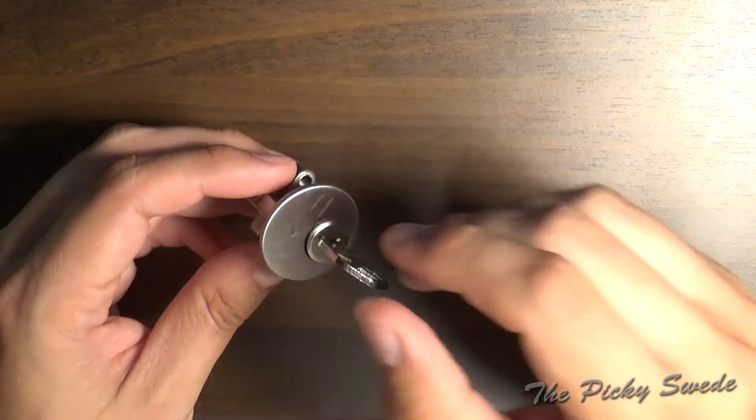Today we will make the TKO3 challenge lock better, or harder should I say. It's a really good starter challenge lock for anyone who is into trying to pick a challenge lock. But the creator of this one wanted me to make it a bit tougher to pick.

So, as you remember from my last video, I picked and gutted this lock, and judging by the pins in this lock, I can tell that the creator didn't have any kind of plan, just random pins with different shapes and sizes and different springs, but he hadn't thought out a big plan on how to design the lock to be hard to pick.

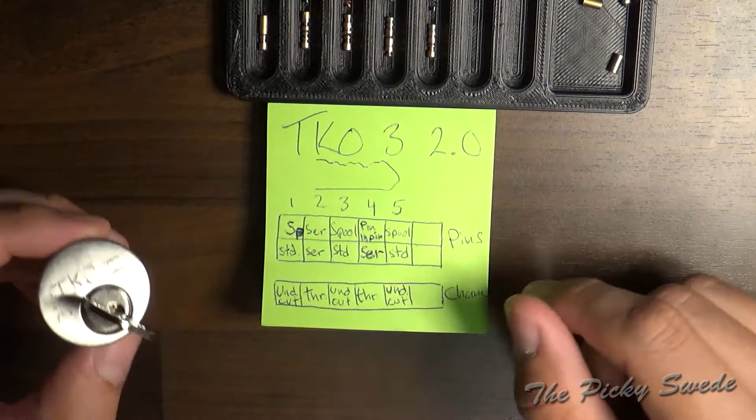So in order to do that, you have to plan, and I have made a small plan here on this post-it note, and I will modify the lock accordingly. And now, spoiler alert for you guys who maybe want to pick this lock later, you should probably not view this video, at least not this part.

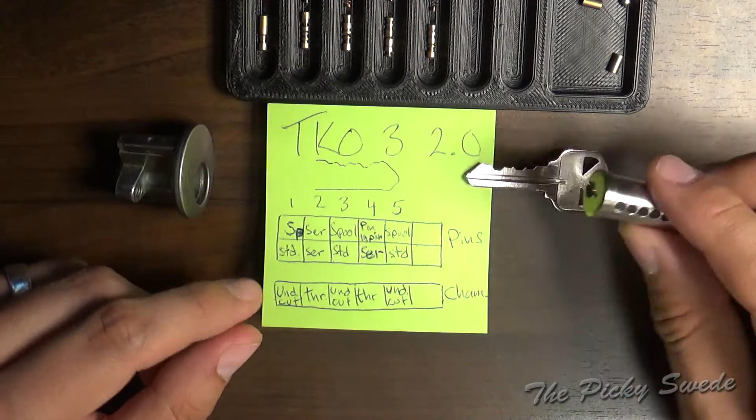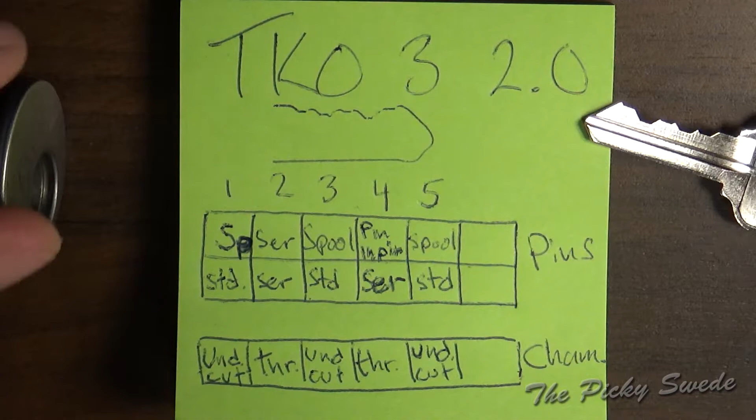The first thing I'm gonna do is go through my thoughts with the pins here, and I'm gonna zoom in for you guys. I hope you can read my writing, but we have the pins here, the bottom pins and the top pins, and we have the chambers. So in chamber number 1 we will make an undercut, partly because he has already made some kind of undercut in chamber 1, so we will build accordingly.

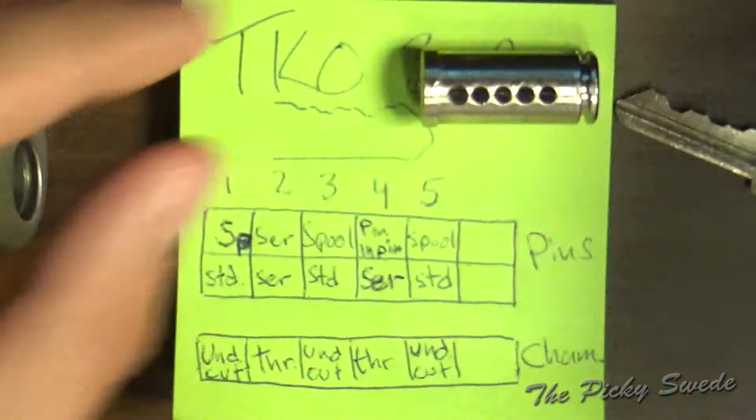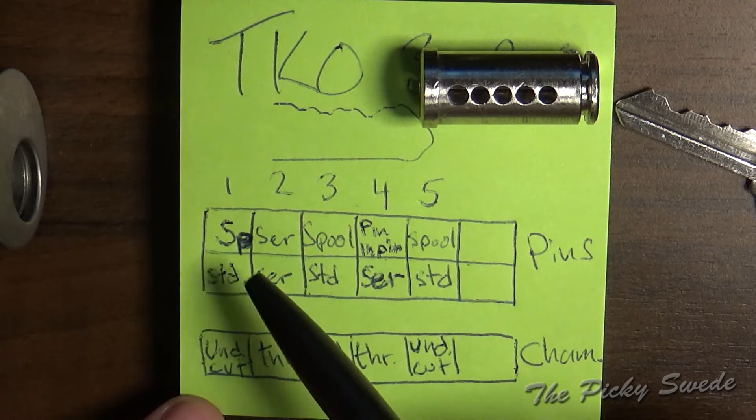We'll undercut this correctly, and we will have a standard key pin, because when you look down the lock, the first thing you should see is no secrets, so you block the view with a standard pin. Above that we will have a tough spool pin that will get caught up in a version of an undercut that I will attempt.

The second chamber will be threaded, and threads and serrated pins are tough to pick, so we will make some sharp edges on all these pins and thread the chamber so they will get caught up and you will think that you set the pins and so forth.

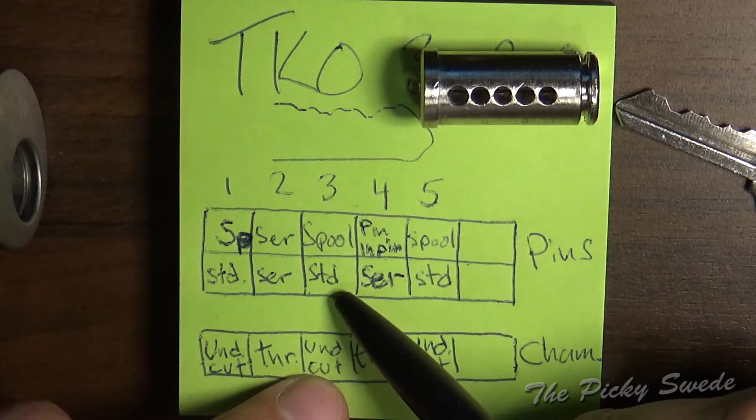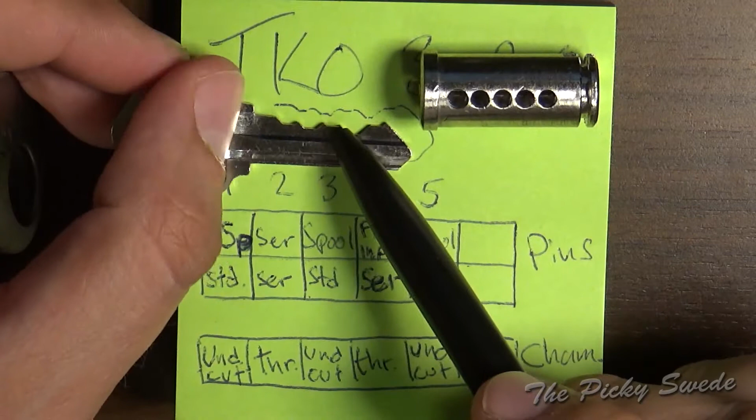Chamber number 3 will also be an undercut, and I don't see any reason to not use a standard key pin, because on the key you have a very high cut on the third one, and a high cut is tough when you have a spool, because you have to raise it so high, so you have a big risk to drop all the other pins. So that's why the bottom pin doesn't really matter. The trick will be to just set this high cut spool.

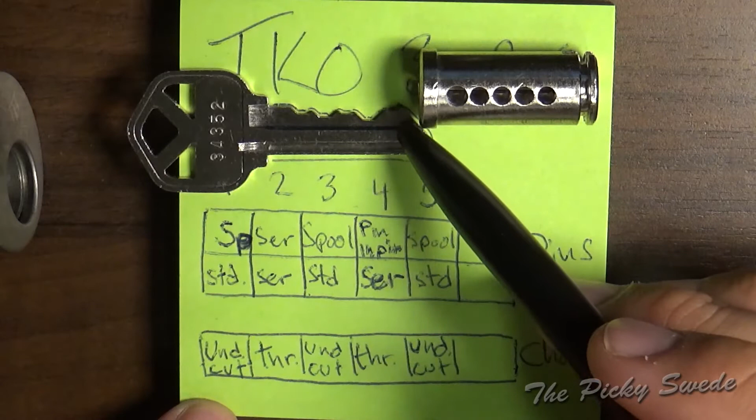And the fourth one is a very low cut, the lowest on the key, and we will try and make a pin in that one. The bottom pin will be serrated, and we will thread the chamber. The fifth one is a very high cut, the highest cut on the key, and of course we will also have a spool here, a standard key pin, and we will also undercut the chamber.

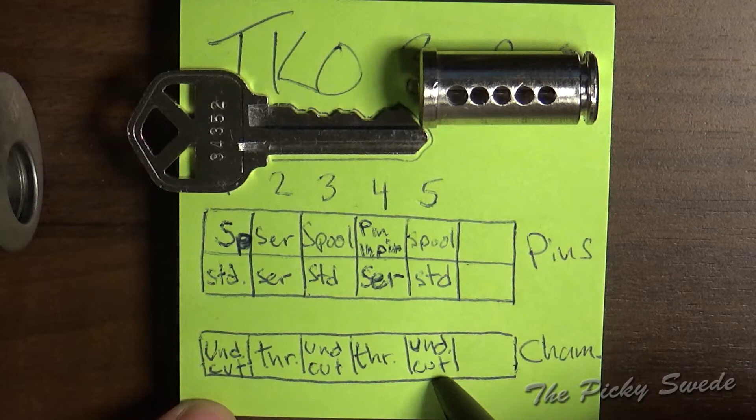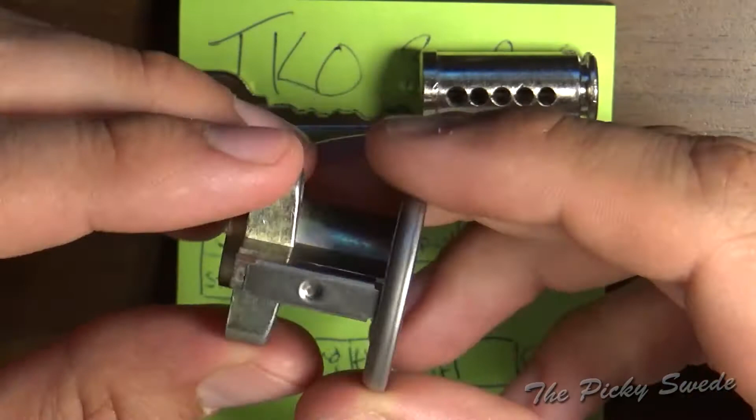The bible here, or the housing, it's different in different languages. I don't think I will do any modifications to this. Maybe I will try to thread 2 and 4 on this one. Just need to remove this cover here for the springs, but that shouldn't be an issue. I think that this just slides off if I use a tool. So that's that, folks, and now let's go on to the machining.

So we have mounted the plug here in our vise, and I have hopefully made it so you guys can view here. And since I live in the rest of the world who use metric, I will thread this using an M4 x 0.7 tap.

And the reason I'm not using imperial or inch is because, well, it's only 2 countries in the world that use that fucked up system, and they are the only ones that can use it. The rest of us don't understand it.

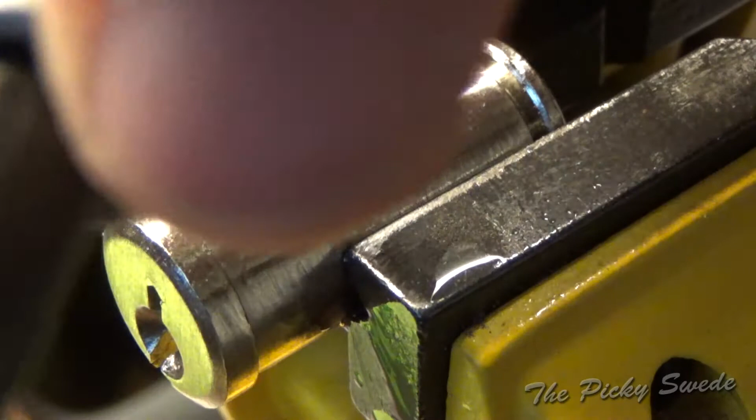And one thing that you should know when threading is that it's important to lube the tool, so we will use some standard lube here, just something in the pinholes. Chambers should be enough, and the trick is to get started with threading so you don't have anything going crooked. It has to be straight. So that's the trick.

The trick here, you start slowly and just work your way down in the chamber until the tap cuts firmly. And here we go. We are now threading chamber number 2 here. And when you've done some rotations, you stop and you go backwards just to cut the burrs so they don't get too long and get caught up.

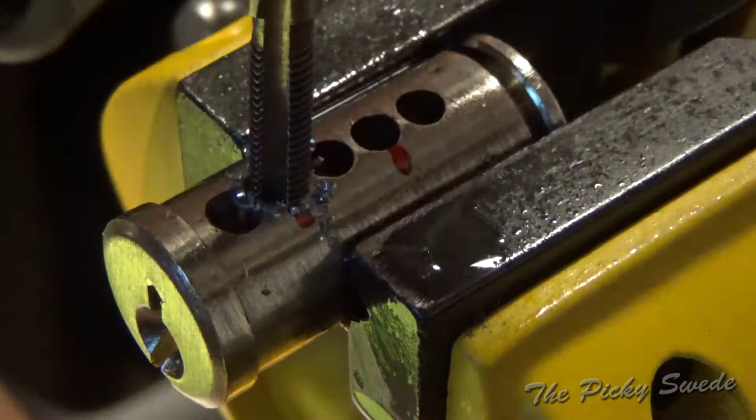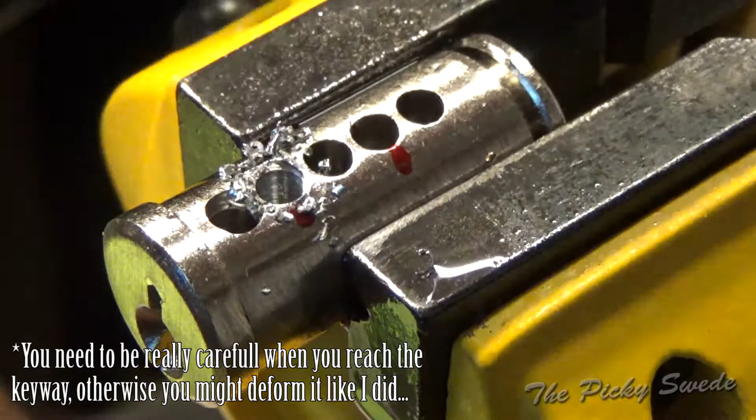And you just keep going like this until you reach the bottom of the chamber and the tool stops. Like so. And there you go. Threading chambers. No harder than that.

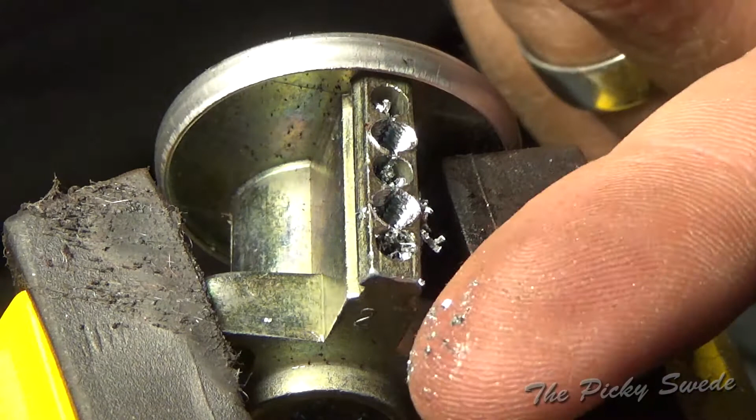Okay, threaded, but as you see we have quite a lot of chips here, metal shavings, and you don't want this in the lock, so I will clean everything. I will use standard brake cleaner, water, and then I will try to dry everything with some dust off, or air in a can if you want to call it that.

Okay, so we have pinned it up with new key pins, as you can see here, but we have an issue, and that is, you see, some of these pins are too long and one of them fell out. The falling out part is not the problem, the problem is that they are too long. So we need to address that issue because these need to be at the shear line, otherwise the lock won't work with this key.

You have 2 options here: either you modify the key to fit your pins, or you modify the pins to fit your key. I find it easier to modify the pins when I have a cut key already. So we need to clamp this in a good vise that's solid,

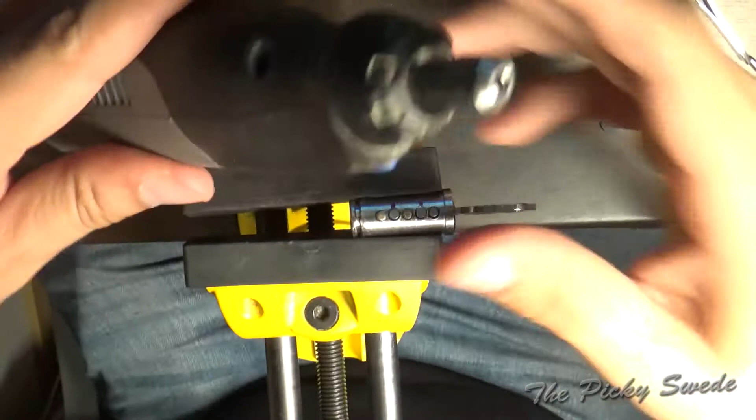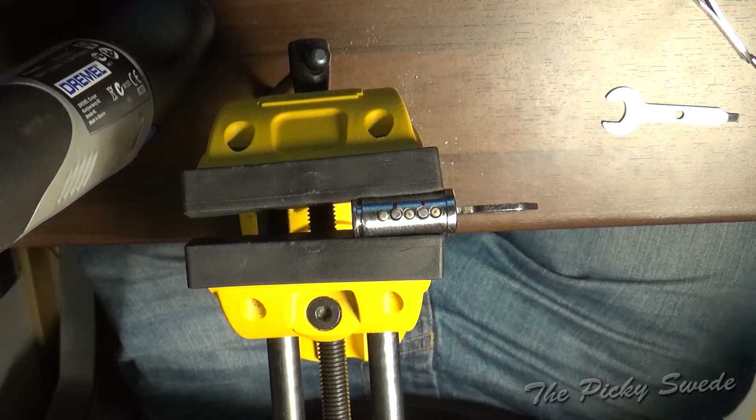and we need some tools. If you don't want to do this by hand, I recommend this multi-tool, a Dremel, and you need some cutting wheel for this, and I think I'm gonna be using this stone, and I will use it to go over the surface like this to get them at the same height all over the plug.

And of course use eye protection, because these are cheap, eyes are expensive, so use these guys. Okay, now for the tooling, and this is gonna be pretty loud, and yeah, I will replace the sound from here forward with some music.

I had one more pin dropping out on me, and he went on the floor. Okay, I will find him for you. Okay, so all the pins are in place and they are at the same height at the shear line, and we only have one issue now. And come on, give me some focus.

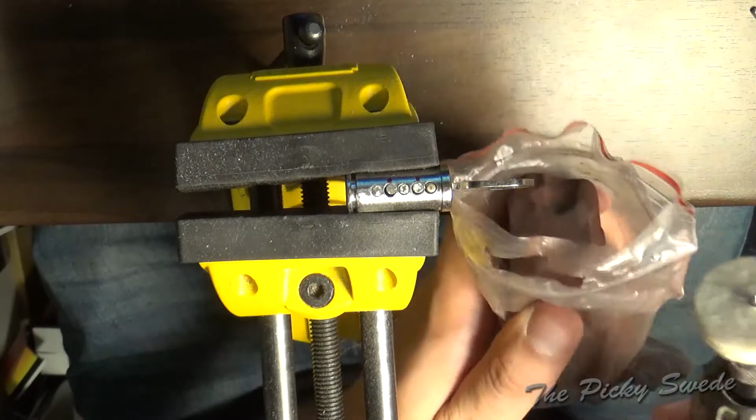So again, safety goggles, and polish away. Apply the wax to the wheel first, and then we will apply the polish here. Like so. And now our surface is much better. Come on, I don't want this unsharpness, out of focus, please.

Okay, I think we have, there we go. So as you can see now, we have a mirror finish on our pins, like so. And don't worry about all the mess you made, because you will clean this up before you assemble the lock. So that's how you make your pins to go with the key.

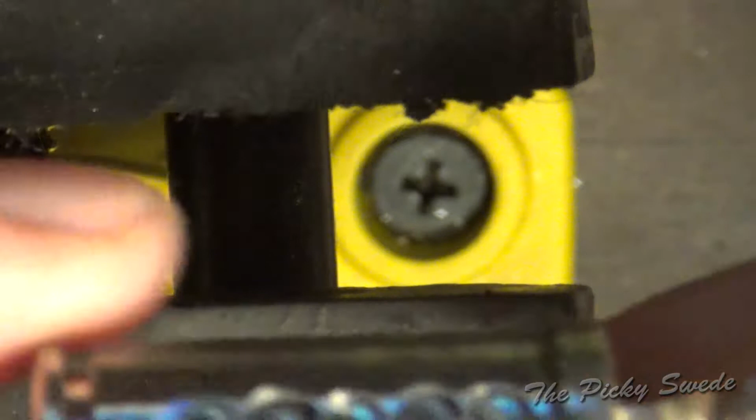Now we need to modify the pins to be security pins in the fashion that we wanted. So we will set up our Dremel tool in the vise like a turning machine. So we have our Dremel tool in the vise, and remember, don't clamp this too hard, because then you will destroy your Dremel tool and you will clamp up the machine axle and it will break as well.

So take a look at our plan for the pins, and the first key pin is a standard and the second one is a serrated. So let's make a serrated out of the second pin. We will take out our second key pin, like so.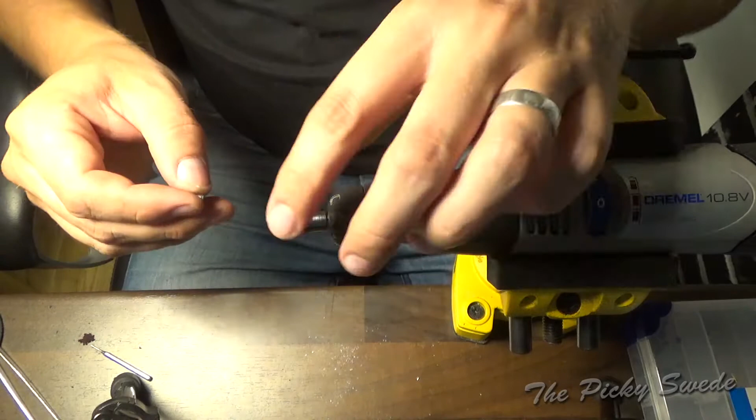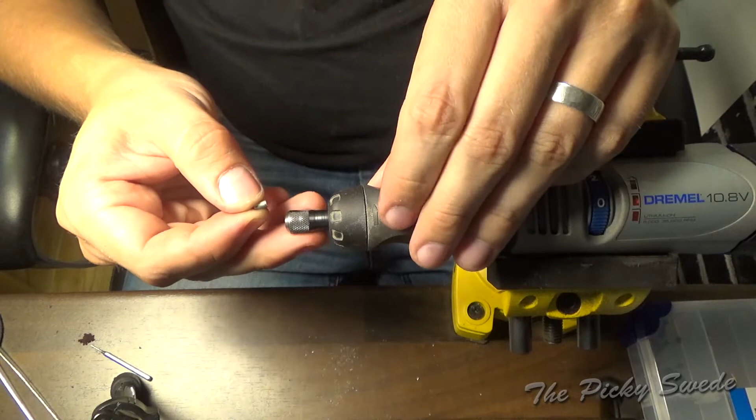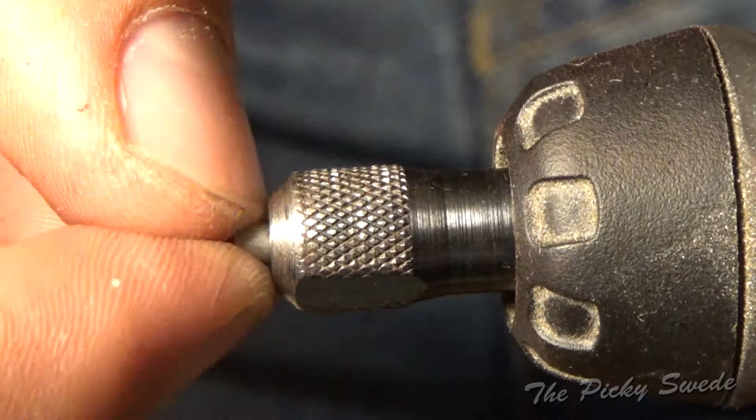And many people want to use a drill chuck for this, but key pins are the same size as the tool shafts to the Dremel, so they actually fit straight into the tool holder of a Dremel. It's a better clamping, I think, than the drill chuck, because the drill chuck only has 3 teeth and this one clamps all around it, like so, and I can control the RPMs to be whatever I want, but since this is a very small diameter, I'm gonna use pretty high RPM.

And to cut the serrations, I will use a broken cutting blade from the Dremel toolbox. You can use anything that you want that is sharp. Prefer these because they are pretty thin. You can also use a saw blade from a metal saw, or you can use a sharp and hard knife. I mean anything that cuts, basically. So on to this, serrations.

And that's a serration. And remember, these security pins only work if they snag on something, so you want sharp edges. Remember that, no fucking smoothness here, you know, 90 degrees edges, otherwise it won't hook. So that will definitely give us some crunch. I think I can do a little better. I see on my camera that I have a very sharp edge here and a bit smoother here, but hey, we're not done yet. We can do better than this.

So we'll continue on like so with another pin, and this pin I will turn it around and make some serrations on the other side of the shaft as well. So we'll just fast forward from here. I notice this takes some time because I'm using steel pins and not brass pins. But I'm pretty satisfied with that one, and yeah, that's a pretty good serrated pin, don't you think?

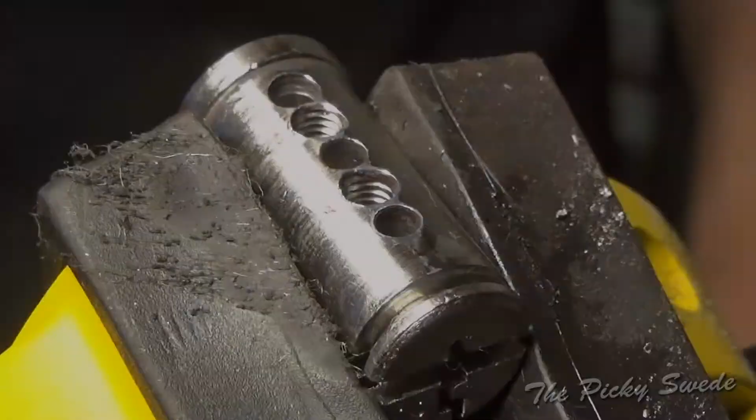So, undercutting the chambers. You know, we needed undercuts on 1, 3 and 5. And I can see here that we have a small undercut on chamber number 1 already. You can hear it, it's really small but not as distinct as the threads here, and this is untouched.

So we will make pretty big undercuts because I want the spools to get caught up in the undercuts. That's what I'm after. So I will be using a Dremel tool and a very fine tool here. It's an engraving tool with a really sharp and fine tip, so I can really reach in like so and do the engraving here to make an undercut.

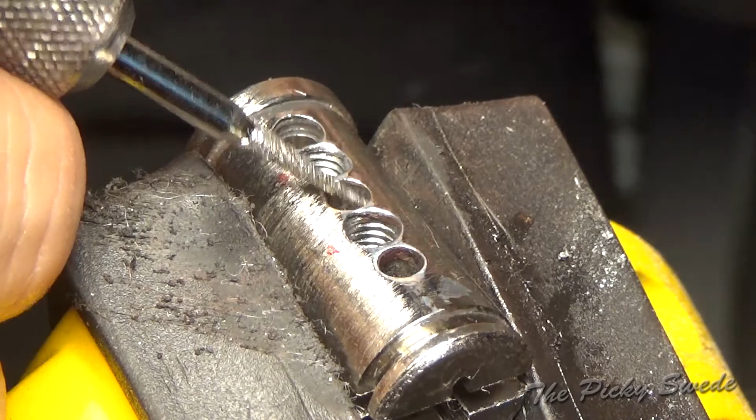And remember, kids, always make undercuts from both ways, otherwise you can pick it the other way around and you have disabled some of the features. So remember, again, use eye protection and off we go. And now we are starting to get a pretty good undercut here.

But this material is pretty hard, so maybe I need to change tactic here. I think I'm gonna finish off with this tool to get that depth I want, but in order to remove material I need something with a bit more punch. And I think we have a small ball mill here. Yeah, so this is a really small mill, and it fits here.

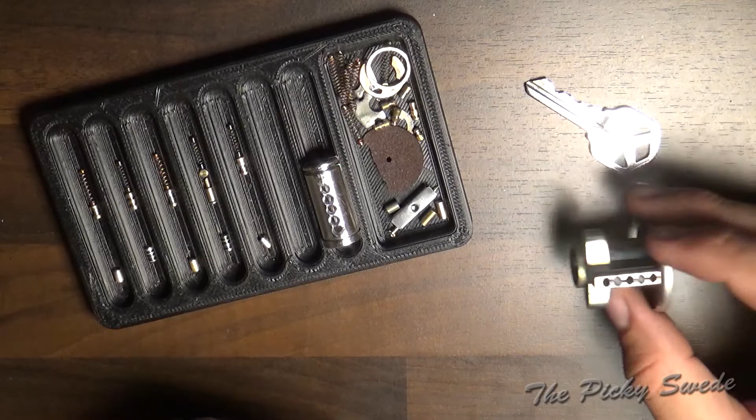Okay, so basically all our components are done and they are cleaned up. So what I'm going to do first is just to make sure the key runs smooth without anything, and it does. I will also put it in here to make sure there's no drag on those components, and then we will start the pinning process. So go and put all the pins in.

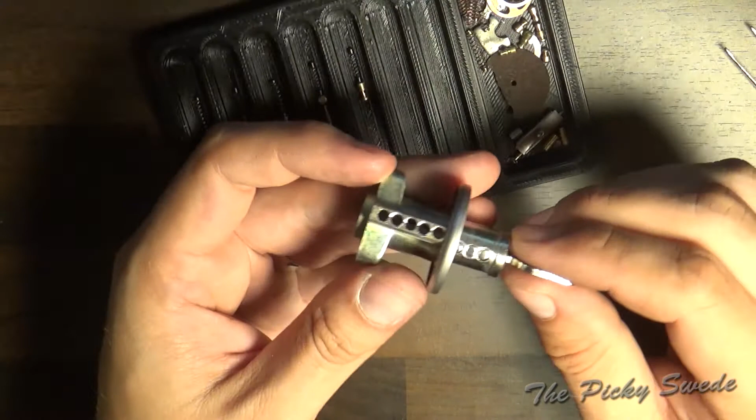You see, this is why I test things before I do the final assembly, and I believe that some of these pins... Okay, I think I know what's going on here, and some of these pins, they wiggle around a bit like this, and that makes them go just above the shear line when they wiggle around. So I need to make these an even more perfect fit here, because otherwise the lock won't operate.

And yeah, I think I'm gonna just use a sander tool on the Dremel and go over this surface a couple of times and make them smooth, and then we'll finish off with some polishing once again, and we'll come back to the assembly part.

Okay, I do think that we have a smoother lock now. I put in a pin one by one, and I went past it with a really fine cutting stone, and then I finished it off with some polishing to make it smooth. And yeah, let's pin it up here and see. We did a good job.

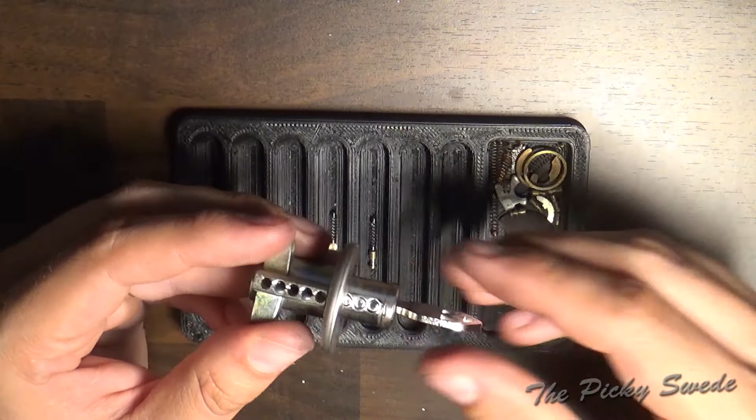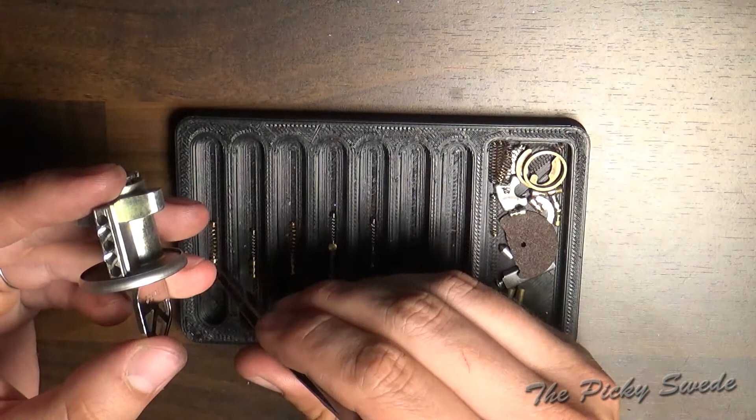All right. Key goes in, operates pretty smooth. It could use some lubrication, but that's for final assembly. Okay, testing. Yeah, no drag. That's what we want. Okay, nice. So should be able to put in pins one by one here to see if they work as intended.

The good thing about putting them in from the top is you can check it to see which pin is being a total bitch and doesn't work. Yep. Okay, so this is the pin in pin. This can be interesting. Oh, it's this chamber.

So we're in, and I'm gonna put in a master wafer on top here to protect the spring. At least that's my plan. We will see how it works for me. You can see right now that it's a bad idea. Doesn't look good in there.

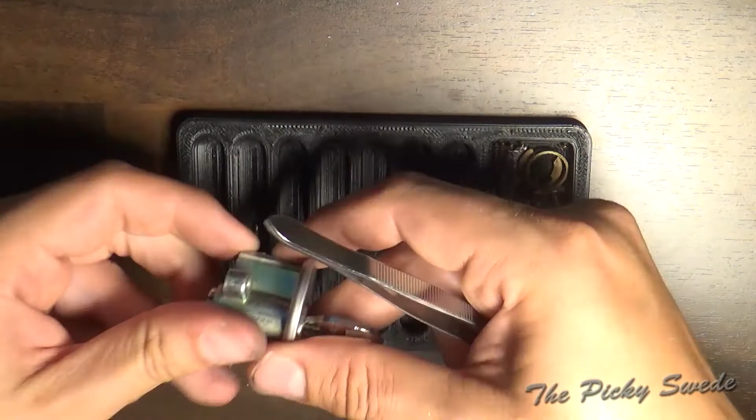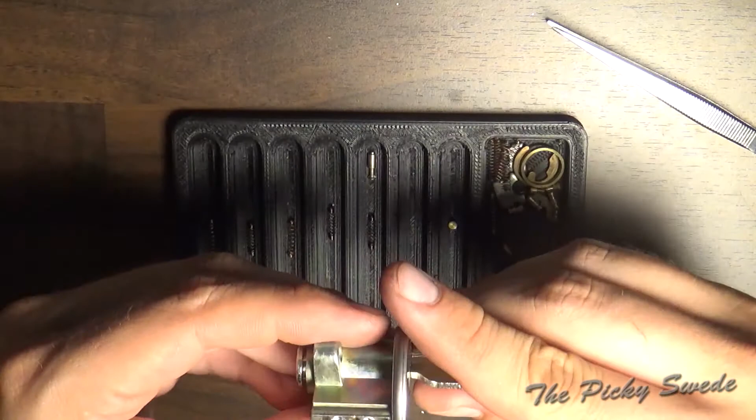Okay, see if we can drop him out. Nope. These threads really make it tough. Okay, so he's out. I have all the pins still here. Okay, like so.

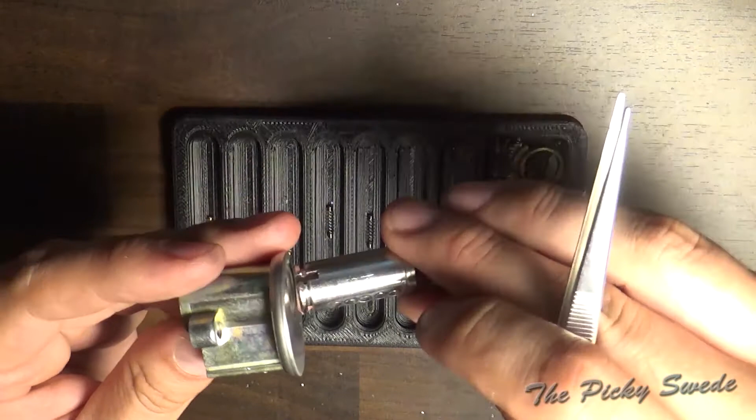I'm gonna take a decision here on which way to mount him. I'm gonna try this way. That can be fun. Okay, so it's a bit of a snag when I had him that way around, so okay. We are simply going to mount him the way we intended from the beginning. And that is with the pointy end up. I'll try to figure that out on my next lock with pin in pin.

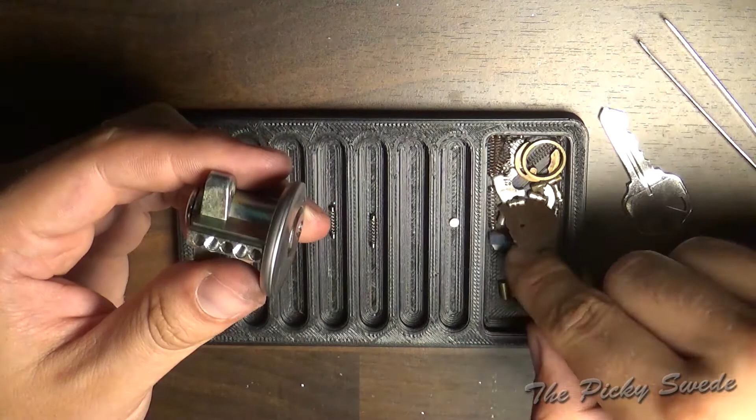So without any springs, works like a charm, no snag, and we take out the key. A bit floppy, but it's okay. Yeah, key goes inside and retracts as it should. Okay, now the spring parts. I wonder if I can just put them in on top and just reapply this cover here. Hopefully I can.

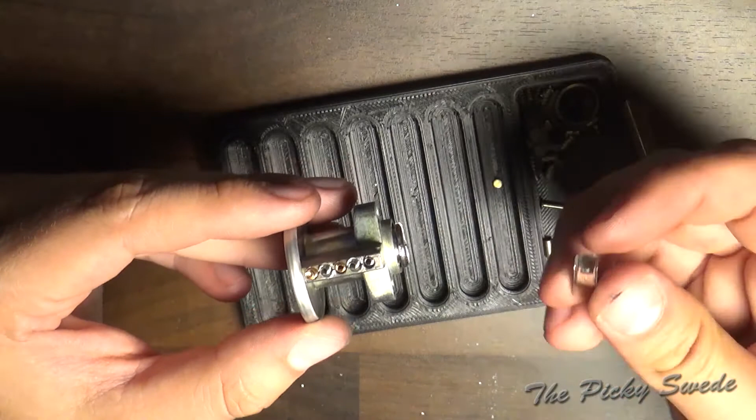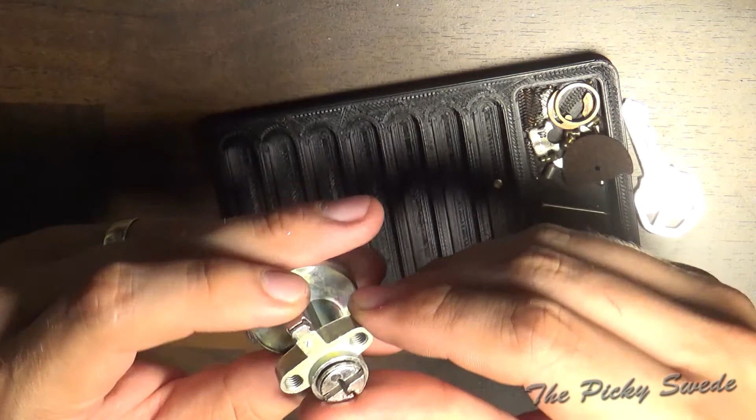And we have a mix of springs here. I think we're going to go with a short one on top of the pin in pin, and we will drop in the other guys like so, so they are different. Okay, now just popping this cover on here. Yeah, American lock, easy to assemble. That's nice. Oh, we have this guy here as well.

You know, to keep it from flying out when you remove the key. I've done that mistake once. I'm going to use my sweet Knipex. This is really nice. Did you break it? Did I? Hopefully not. Or is that even for this lock? I don't know. I hope it is.

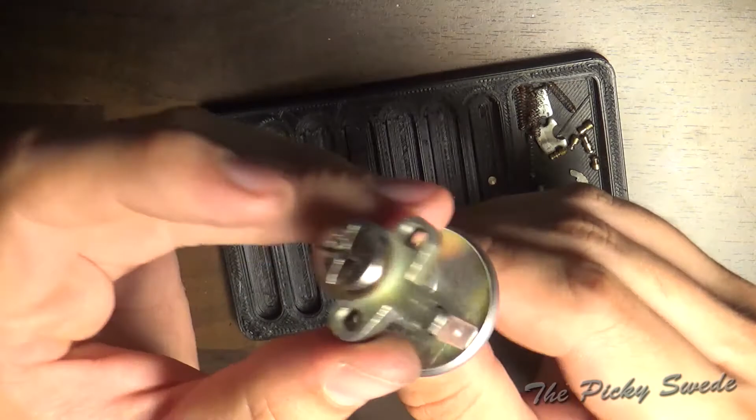So key goes in, works. I think I'm just gonna adjust this guy here, but you know, it works. Key goes in, key goes out. It operates as it should, but you could always use some ASA lube. There you go. And that's a challenge lock for you, my friends.

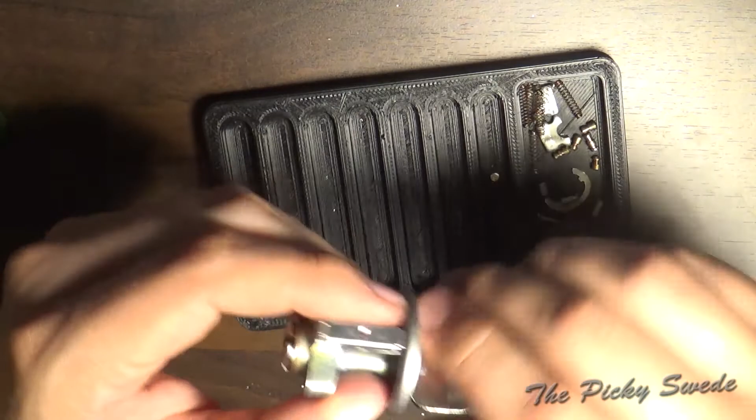Perfectly okay, not the highest standard, but I think if I work this key in and out, I will get the lube everywhere and it will operate a bit better. But there you go, that's how you make a challenge lock.